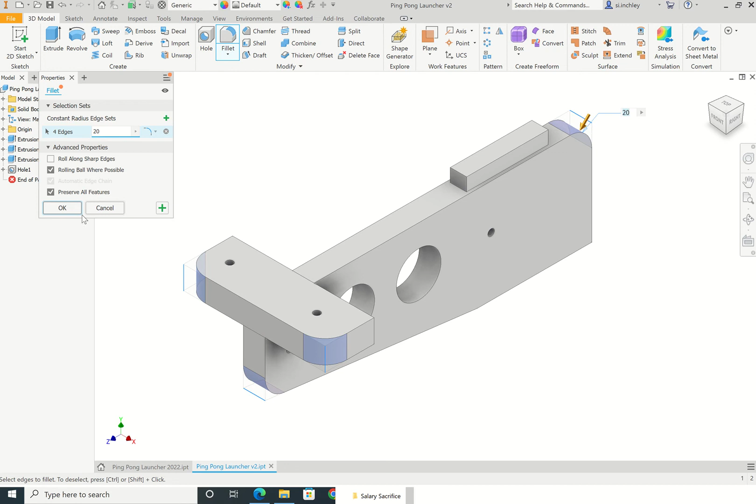So I'm going to select this edge here. You can see what it does. It rounds off that edge perfectly at a 20mm radius. I'm going to select this edge also, and maybe this edge at the top. Okay, just like that. So that's going to be okay, like that, and select OK.

The next thing I want to do is make the handle, so I'm going to build the handle into here, and we're going to use curves on that rather than straight lines, which is what we've done so far. So I'm going to start a 2D sketch and click it onto this surface here, zoom all so I can see the whole thing. And then I'm going to project my cut edges once again, because that helps me lock onto these sides of these edges.

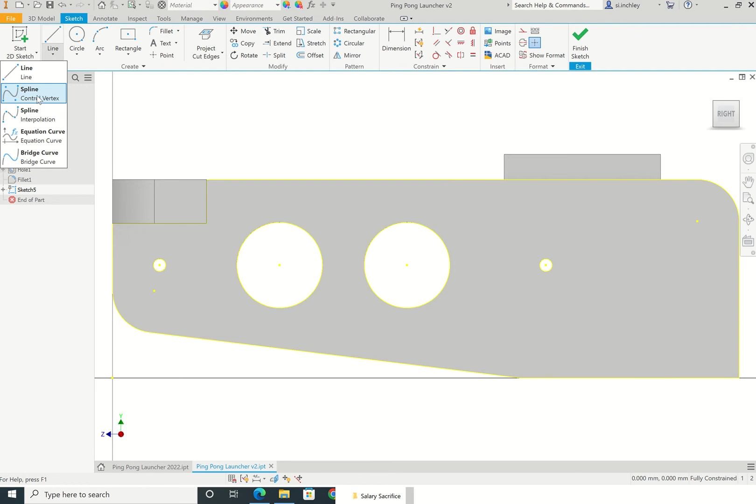Okay, so I'm going to select my line tool, but instead of the line, I'm going to come down and select this first spline, control vertex. Okay, so now I'm going to come down to here, and somewhere along here between kind of the line of the peg and the edge, I'm going to start with my curves.

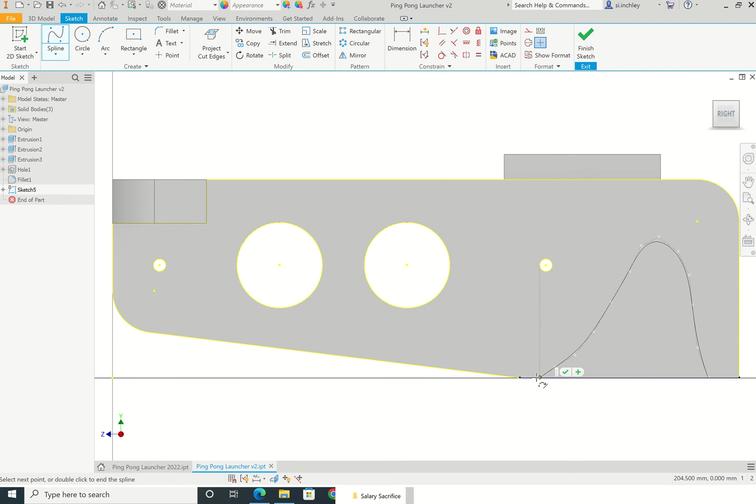Now here, wherever you're going to draw a kind of continuous line up like this, what it does is it will curve it according to the dots that you draw and make a continuous curve roughly using each of those dots. So now I'm going to just keep selecting, and the more dots you do, the smoother that curve will be. So something like that.

Okay, and once you've done that last one, which should be on the line as well, so you start and finish on the line, I'm going to click OK. Now that's drawn, and you can see all of those dots are on there. The interesting thing about this is you can move some of these dots. So if you think, oh, okay, this wants to be a little bit more bent here, I can just pull that one in. Maybe I wanted this one to be a bit further out. I could do that. I could even grab the end here and draw that further out as well, like this.

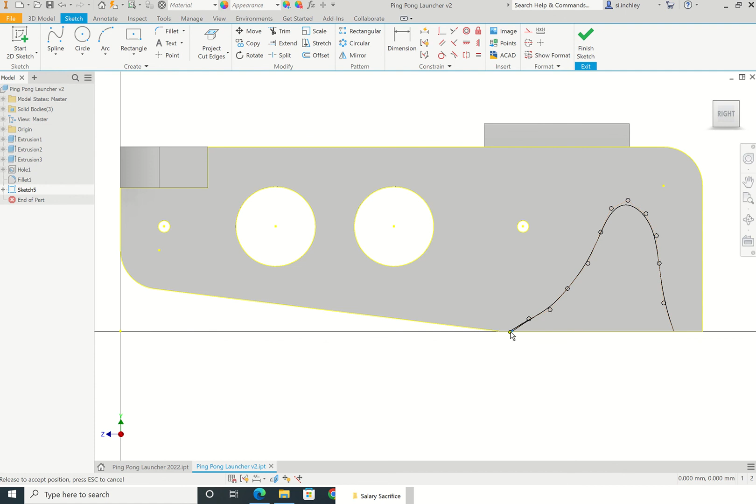Okay, what's interesting about this as well, if I wanted this to be a specific dimension, I could come up, put a point on the edge here. This would be one way of doing it. I'm sure there's many ways, but this is one way. Put it straight onto the line there, then dimension between here and here, that line, I could set that to maybe, I don't know, 12mm.

And then I can escape, which is one way of getting out. Press the escape button, one way of getting out of the dimension tool, just like that. I've pressed the escape button, and now I can maybe just select this line and drag it onto that point, and now that's exactly 12mm away from that edge.

Okay, I think this one, maybe I'll just bring this one down just to make it a little bit more gradual like that. See how we are just adjusting. You can see this one is quite off, so if you want it to be a little bit more central, that would help it be more of a gradual curve. Okay, that feels pretty good to me.

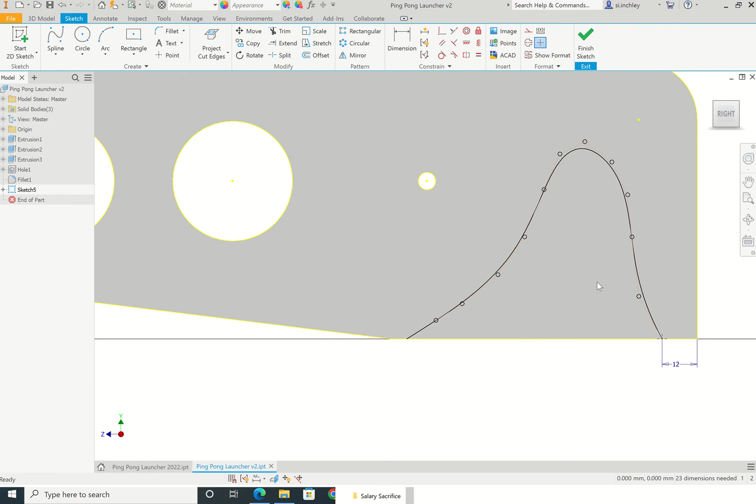So I'm going to finish my sketch and see if I can extrude that part without drawing a line along here. Because we projected geometry, it should work. So let's press the extrude button. Instead of adding material, which is what we've always done with extrude, we're going to press this button here, which is called cut. All right, and now I can select that area there, and you can see it's trying to cut through.

Now it's only going 12mm, which was the distance we did for the last extrusion. I want it to go all the way through, so I'm going to change that to 20mm. There's a number of ways you could do this. You could either change this to 20mm. You could also click this button, which would be through all, and it will go all through this surface that you've selected.

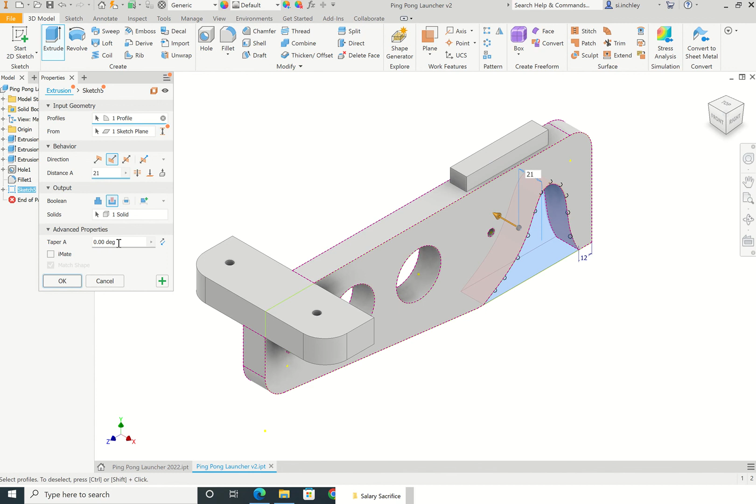All right, so that's one way of doing it, or you could come back and select 21 like that, and that goes through the amount of material that you originally made. So there we go. Oh, maybe it was 20. I can't remember, but it's gone all the way through, and you can click OK and see what happens there. I'll finish this here before moving on to the next video.